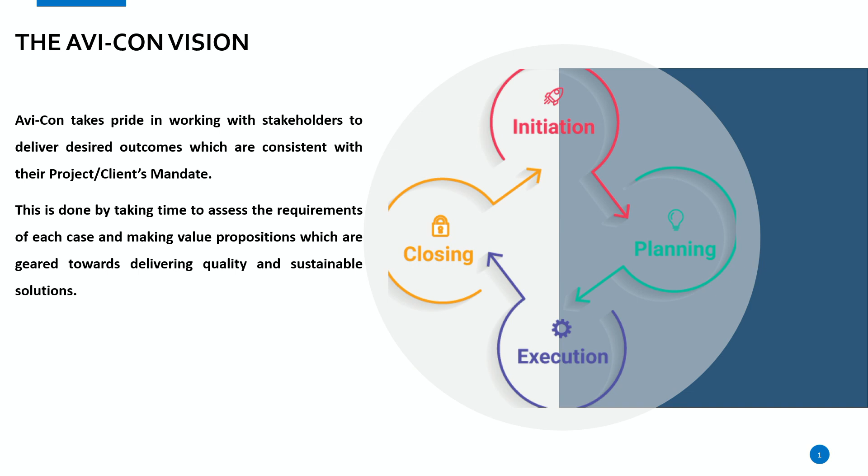So while we do sell, we don't go after all the retail products. We aren't really driven by making all the money or having all the market share, but the guys in here who know us know that we go after sustainable projects and solution-driven projects. So this is really what I just said. So we represent a few of the larger companies in the world who do engineering products.

Here we have a division of one of the companies called WABO. We do engineering joints. And the reason this is important to me is one of the first international training sessions that we took engineers from the Caribbean to, we took them to the WABO Institute in Buffalo. And the reason for that was that there were some bridges that needed finger joints. There were some government campuses that had leaks at the roof. And there was a big hotel chain that had 20 inches of drift at the top of the new wing that was going to be added onto it. And the structural engineer on that particular project, when he approached us for the solution, was very happy that we were able to help him do the 3D modeling at WABO for the project. So some of the guys and ladies in here would have gone to that facility and been exposed and trained in some of the WABO products. So that's why we're here.

And Shalini would have, at some point, I think yesterday, mentioned the need for collaboration and support. And without knowing it, my presentation is really geared towards how we collaborate with the industry, with your sector, to deliver the objectives and the value that the stakeholders look forward to.

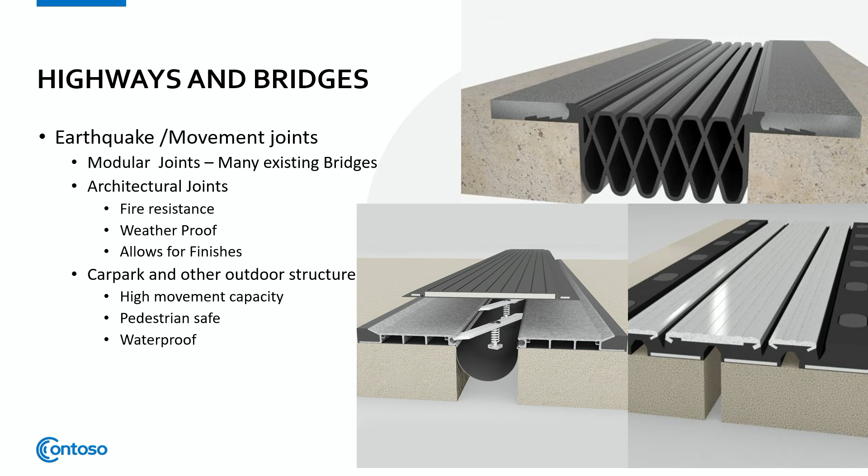Okay, yesterday you may have seen me around. One of my suppliers was here. That's Chris from Avanti.

There were major options considered. CBI, Chicago Bridge and Iron, was contacted to dismantle the tank and reinstate the base. Paramount and Junior Sammy were asked to bring in big cranes to retrofit and lift off the tank, and then do over the base. Tucker and Schlumberger were asked to pump mud and other stabilized material underneath the base.

And one of your members actually worked with me on that project, and we sent the engineering design for the pumping and a pumping plan to the foreign engineers, from one of the most technologically advanced countries, who reviewed one of your local engineers' work, and they approved it. So in this case, we had to air freight in the thing because it was on a critical path preventing the plant from starting up.

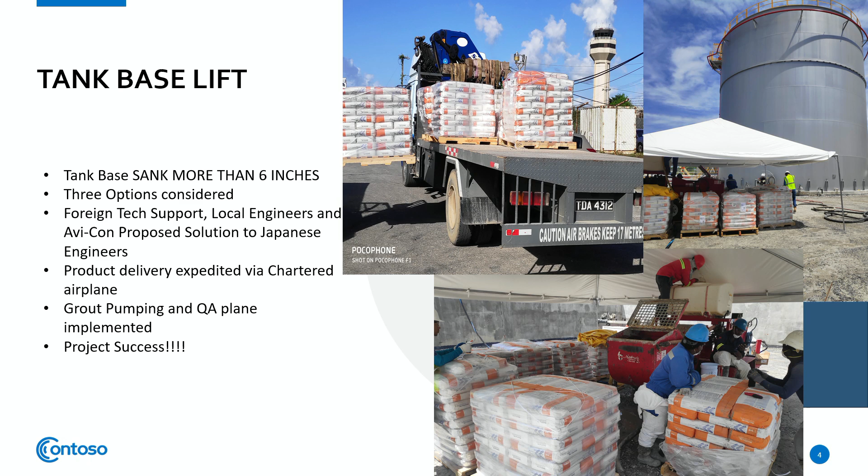Junior Sammy was the first culvert. We were able to achieve, I think, 28 newtons in 6 hours on Thursday. By Friday, we were making concrete to put into the culvert. By Monday, the job was reopened. That concrete was batched in Claxton Bay, and we helped them design the plant.

A special retarder was used at a very low dosage rate where we calculated the number of cycles that the truck would actually rotate the mixer, bring it up to the site and then combine with other additives to accelerate the setting time of the concrete. Again, this was done in combination with local engineers as well as our technical support from Master Builders.

The second project was even worse because we batched the concrete in Princes Town by Lakshmi Singh and brought it up. Subsequent projects became easier because the concrete was batched in Arima. So that is a case where we use very high-tech admixtures to achieve very good strengths. People in the precast industry in Trinidad often suffer to get 3,000 psi, or 21 newtons, in 15 to 18 hours. And we were able to get 26 newtons in 6 hours.

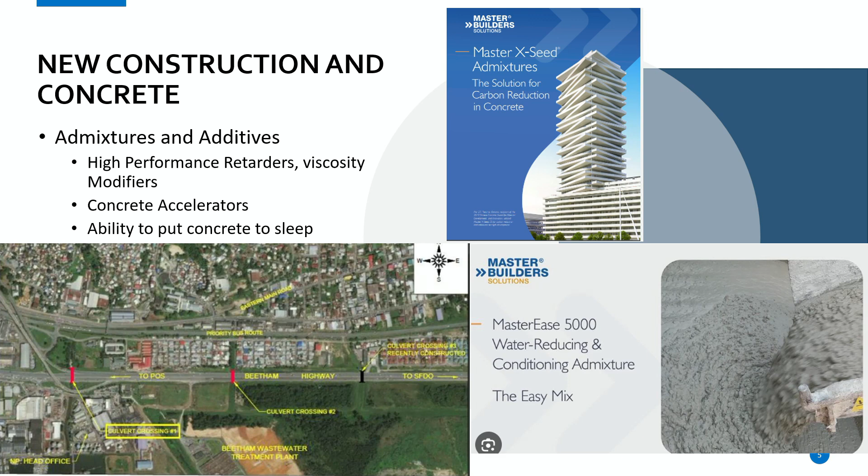In this particular pour, the surface of the slab was intact, but the entire bottom was corroded. So instead of demolishing the entire slab, we shored it up and we poured the concrete from on top, and it went into the entire bottom. And when we stripped the forms, we tested to see if there were any voids or any hollow points. We used the bonding agent on the underside, and the project still stands very strong today. Again, regional architects, regional engineers, and some of the elders of this organization were involved in that project.

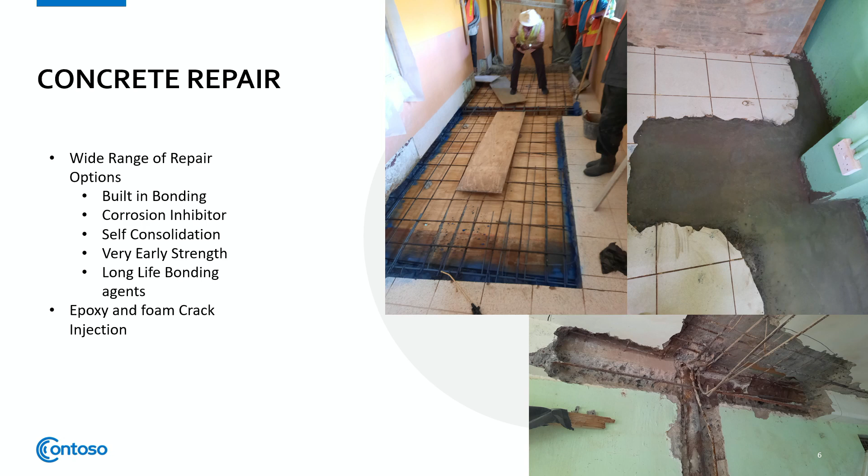Same Atlantic Ocean. So people think that in the middle of Trinidad, or on the side of the coast where we have the Orinoco water, we're not subject to chlorides in the air, but at 36 miles, and the other islands that are even smaller, the entire island has a maritime climate. So salt is in the air and it's deposited. Why is it important? The guy who was from Trinidad and is now in Florida is employed at a company, and he speaks with me a lot about it because he would have gone on some of the training where we discussed this at length.

A few years ago, there was an apartment building that failed, and that changed the way the asset management in Florida happens. To do any concrete repair or any structural repair, the engineer has to go through all the science and apply a work method or a repair method for every building to extend the life of the building safely. So this type of data and the training that we would have offered, in fact, our parent company is currently doing a lot of seminars and webinars with them to help guide them on the repairs for those buildings. And they're using our products widely in Florida right now.

This for me is the star of the show for AVI-CON. This is carbon fiber retrofitting.

IKK, I did a presentation for IKK once on carbon fiber in Val Park. Everybody who knows IKK knows where we find him on a Friday evening.

And one of his students, who considers IKK his guru, got a job in the energy sector. And he was there for the presentation. And one day I had a visit with one of my technical support reps from Master Builders, and he calls me. He said, Avi, I have a crack in a beam. You could come and check it? I said, no problem. So his boss in German says to me, Avinash, do you fix cracks? I said, well, yeah, we fix cracks. That's what we do. And then she showed us the cracks, and we said, this is a bad problem. We need to go and see it in real. So we went into the plant.

Members of your organization who were trained in the use of our systems did the retrofit calculation design, the condition analysis together with us. We proposed the retrofit design changes to the Germans who are responsible for the plant. The Germans were, wow, are you sure you could do that? I don't think we should do it. We said, what options do you have? One of them suggested load path transfer using structural beams, reduce the spans on the beams, use steel sections and modify the foundations and go on.

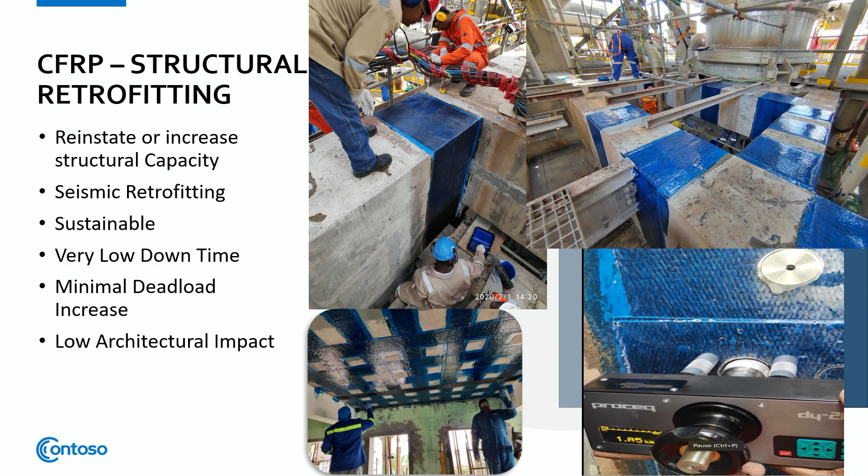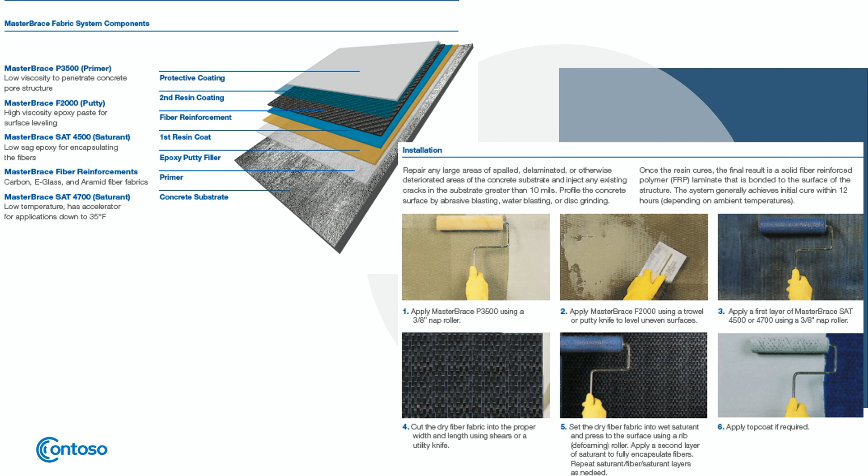It withstands ponding water, hurricane force winds, the shearing of turning tires on it. This is important because a lot of buildings are subjected to corrosion and water ingress and damage. We are probably on about our 6th or 7th car park that has started to use this product. We had one failure on a car park, 2 failures on the same car park.

Again, for all the car parks, engineers are consulted. The project is designed. The process of quality control is implemented. Proper equipment is used for prep. We don't use grinders for prepping for car parks. We use a shot blasting machine, and we have 2 of them that we support our customers with.

In the car park that had the failure, the ramp was designed at the wrong angle. So when cars turn in, the tow hook at the bottom of the car was cutting into the system. And for the first 5 feet of the ramp, the system is gone because it's sliced out by those tow hooks. So we're going to have to scarify that area to create some traction and use a crystalline waterproofing system.

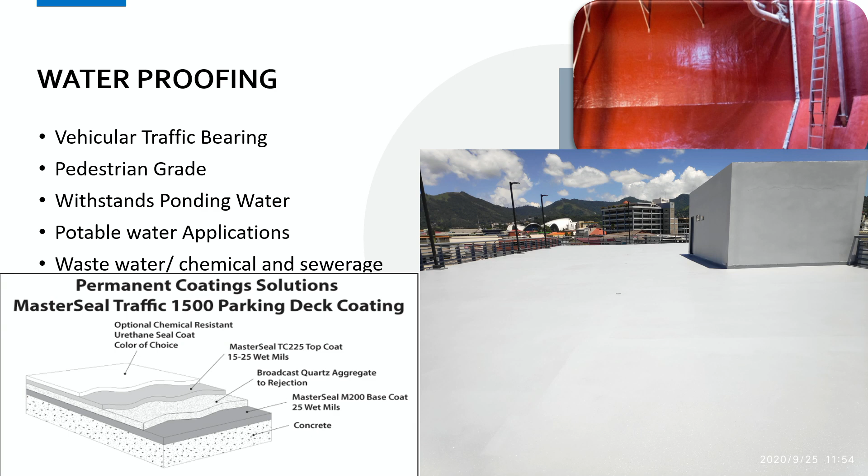This is another type of waterproofing system. This particular system is white. It reflects 95% of incident heat. The primary reason for applying it on these buildings was because of leaks in the roof, in the concrete, spalling concrete, coastal, very near to the coast, so a lot of corrosion.

There were joints. In fact, on this particular building, one of your engineers worked on this and he told me, when I was an apprentice, I was on this job and I found the building was too long, so I put 3 joints. I said, did you calculate the movements on the building? He said, no, I just chopped it and I put some 1-inch joints. I was like, okay, but every joint was leaking. So we had to use Wabo joints to fix those joints, but all the roofs, the rest of the building will be done again, will be completed.

There's no leaks. The heat is reflected off of the building. The classrooms that are in red were not treated. The ones in white were treated. And last year, we had a heat spell around the same time of the year. It was very hot. In some cases, temperatures reached 40 degrees outside. The buildings in white were at ambient temperature. The buildings in red were unbearable.

And the agency responsible for this has committed to convert all buildings under their care to the use of the system. The particular system used here has a 20-year life. So at about 20 to 30% of the cost of replacing the roof and putting a radiant heat barrier, we were able to extend the life of the roof by 20 years, waterproof it, and reflect the heat off of the building.

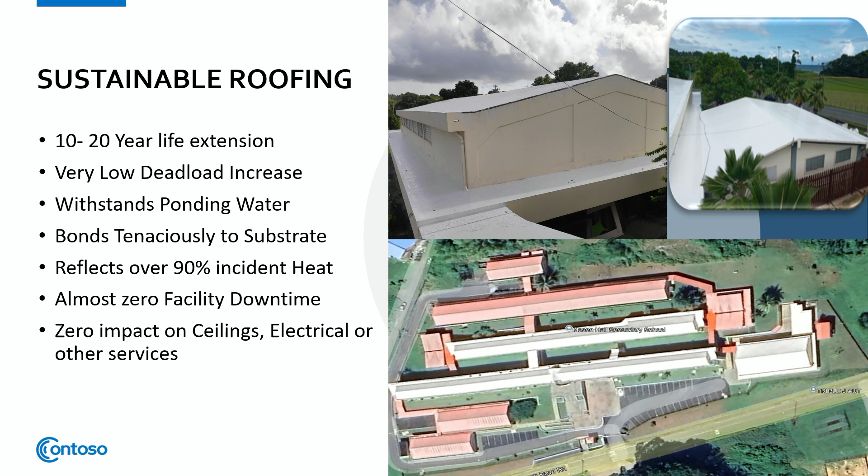It was all done without shutting down the schools and without having to interfere with the ceilings, electricals, or any other utilities. Again, that's another example of collaboration with the stakeholders to design a solution that benefits them in a sustainable way.

Chris, who was with me yesterday, is from Avanti. And what we do with Avanti is chemical grouting. I know that we might have more civil applications for this than structural, but again, one of your engineers specified it for a project where a building was built on sand, deep sand, and when he did his analysis, the sands were going into liquefaction, and he opted for 1 or 2 of the products to be injected into the existing ground condition to reduce the liquefaction in and around the foundations of the building. So that is how this type of product could reduce liquefaction around some of those susceptible foundations.

He was here because we had an emergency visit in one of the estate plants in Point Lisas. They have a foundation with a critical vessel on it that is experiencing punch through. If any of you would have worked on the estate, the first 8 feet of the soil there is basically imported fill, and then it's between 100 and 120 feet deep before you get to bedrock or competent soil, and they have to pile everything. Some people build pad footings, so lighter vessels or lighter structures on this without reinforcing the soil. And again, this is a critical part of the plant that is susceptible to failure.

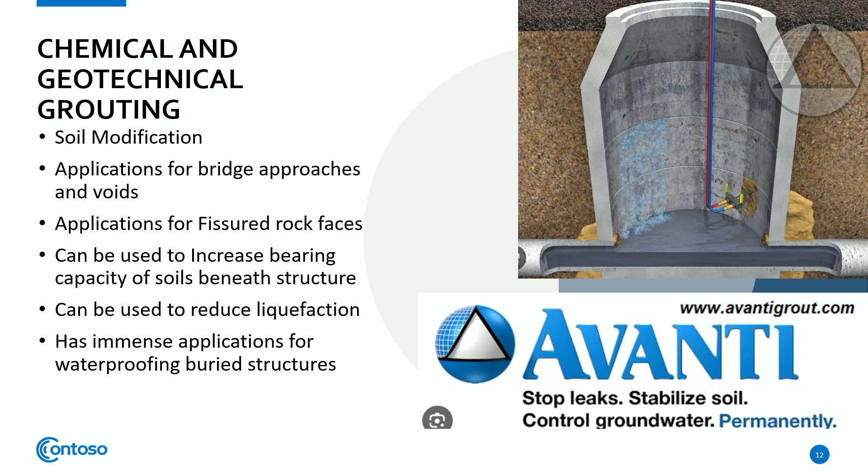Yeah, I think that's it for some of the projects that we've worked on. These are only some of the projects where we utilize technology in collaboration with the stakeholders, the consultants, the engineers to deliver a sustainable solution. And again, it was purely by chance. After I got the agenda, I saw what the theme of this conference was, and we actually fall in line with it, where we're looking towards improving the built environment to last longer and hence get more value from it.